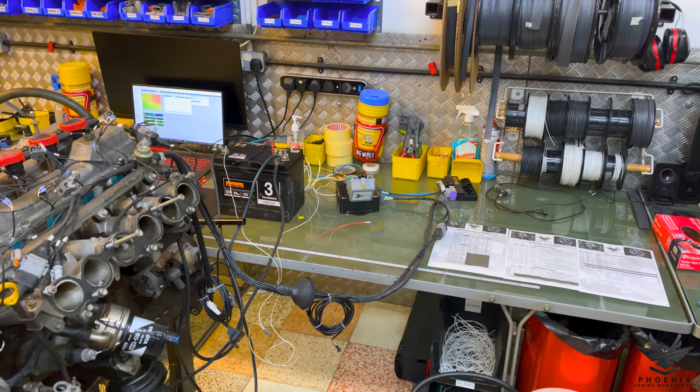Right, as I said, this is a JZ modular harness for an ECUMaster black, but a bit of a weird one, this one. We actually did this harness back in October 2021 for the customer as a JZX100 plug and play. So down in the description below, I'm going to link you to that original video where we went through everything of what the harness used to be like, because I'm not going to go through everything today.

But what we've basically done is the customer now wants to put the engine and harness into another vehicle. So we have actually changed it from being plug and play into a JZX100 to having its own fuse box, so now it can work in any vehicle that he wants to put it into, either now or in the future if he changes his mind again. Obviously, it is running an ECUMaster black ECU. It is completely modular like you see in the original video.

So what have we done? Well, we have done a little bit of it, and I've got some pictures which you'll see at the end of the little changes that we did make, but I'm going to go through them with you now. So as you'll see from the JZX100, there used to be 3 body plugs that would have plugged directly into the JZX100. They've now been removed. We put this plug in the middle because two of the plugs were too short to reach the fuse box. The other wires, as you can see, are just running along that and then into the fuse box over there.

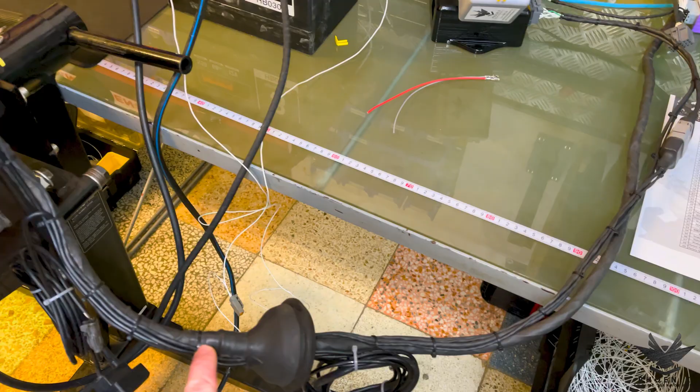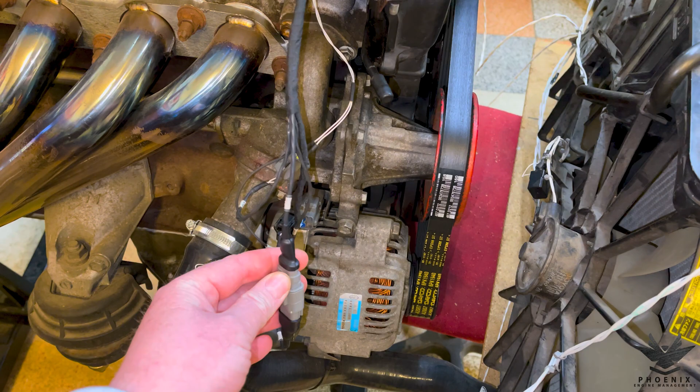Now, what we also had to do is put the alternator wiring in, because on the JZX100, it doesn't come with the alternator wiring included. It's part of the body harness. So it comes out of there, runs all the way along here. So you can see the 2 sort of sections that pop in there. It goes through the grommet over there, pops up, goes all the way along over here, over the top over there. So I'll get my hand out of the way because the camera keeps trying to autofocus, and pops down to over here. And you can see we've got the alternator plug over there. And then that goes into the alternator.

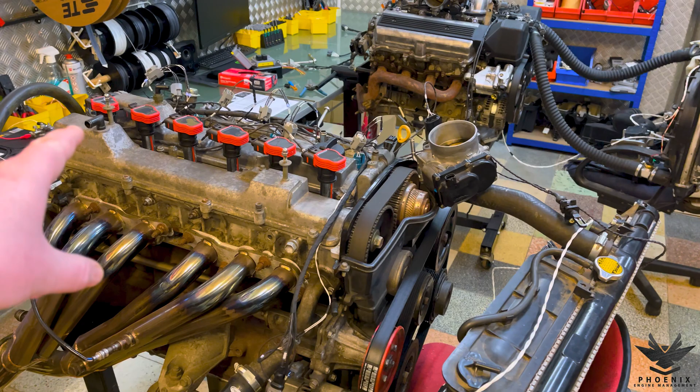So again, because of the vehicle it is going to go into now, we needed to include all of the alternator wiring in there so he can just plug the main power for the alternator in. Everything else in the harness is staying exactly the same. We made some repairs on the harness because I think one of the terminals on the crank sensor plug wasn't working anymore, and I think the cam sensor plug was broken, so we have actually changed that as well.

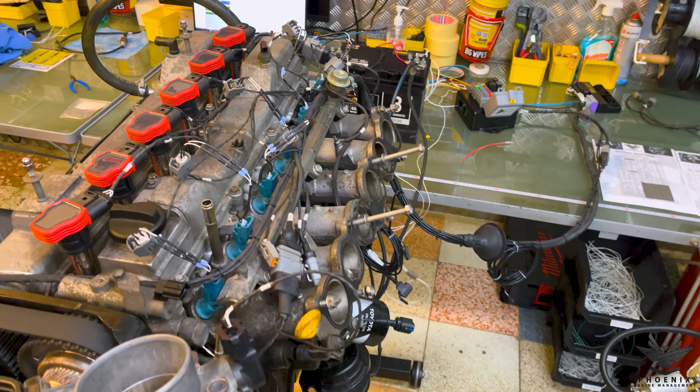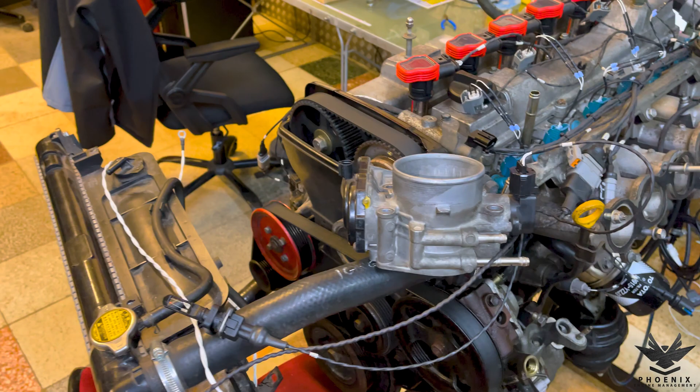All right, so that's pretty much all the changes that we've made. We just obviously neatened it up a little bit. There's been some alterations that have been done elsewhere. Things like he's now using a Nissan idle control valve. So obviously that's all been changed prior to it coming to us. And obviously we've added in the fuse box, which is the major part over there. So that is now the major thing that we have changed.

So what we're going to do now is, instead of going through the whole layout like we normally do, because again, you can watch the original video, it goes through everything here because all of the stuff hasn't changed, like the coils and injectors, etc. So what we're going to go through now is the fuse box, so the customer knows exactly how to wire everything in to the new vehicle that he's going to be putting this into.

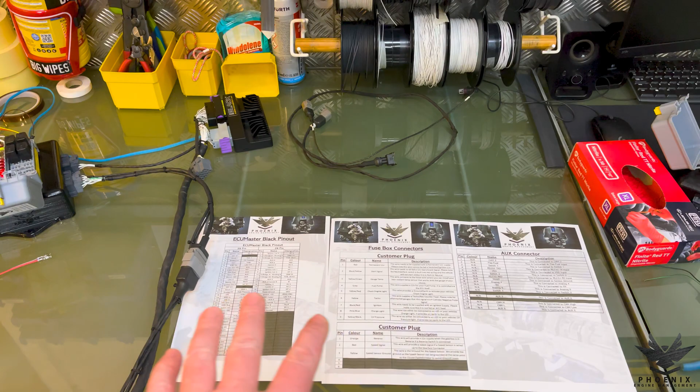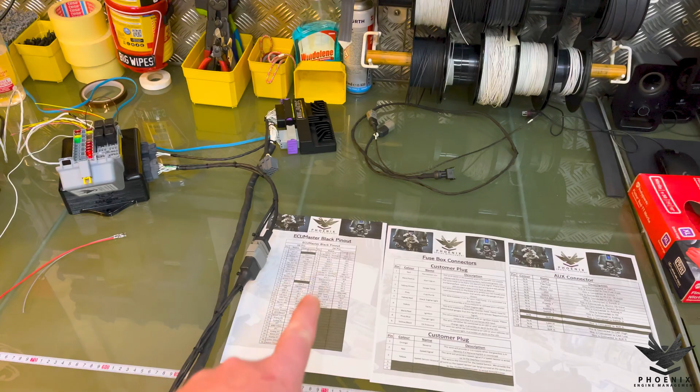So with all the harnesses, we do have the welcome packs. This is just 3 of the 5 pages that you would get via email when you buy the harnesses from us. So first of all, we're going through the entire pinout of the ECU. Now, obviously, not all of the pinouts are applicable to everything. So for instance, he's not running drive-by-wire. So although drive-by-wire wiring is in the plug, he's not actually running that.

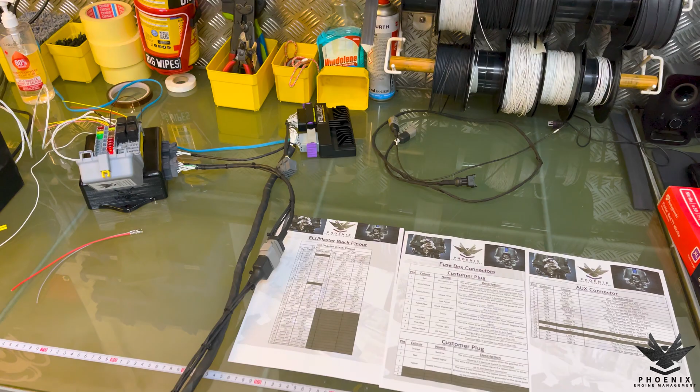He could upgrade to drive-by-wire if he so desired, but in this case it is not actually wired up. So some of the pinouts will tell you exactly where everything goes or what it can be used for, but not everything is actually utilized in these harnesses. Okay, he is using quite a lot of the stuff. So he does have all of the stuff like oil pressure and temperature sensor. He does have a fuel pressure sensor as well. He is also using a gearbox harness.

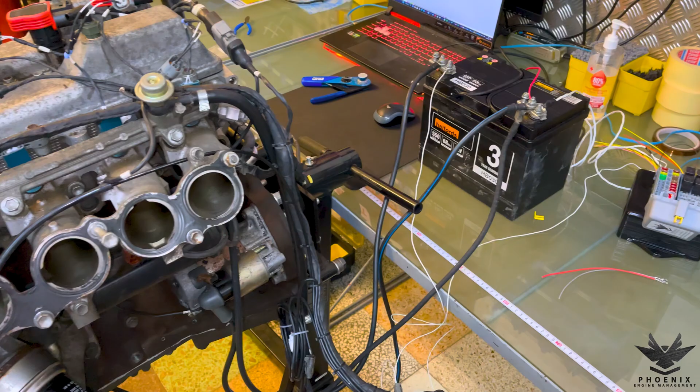He's got a reverse switch. I think he's using a BMW gearbox. So he is using a lot of it, but not all of it.

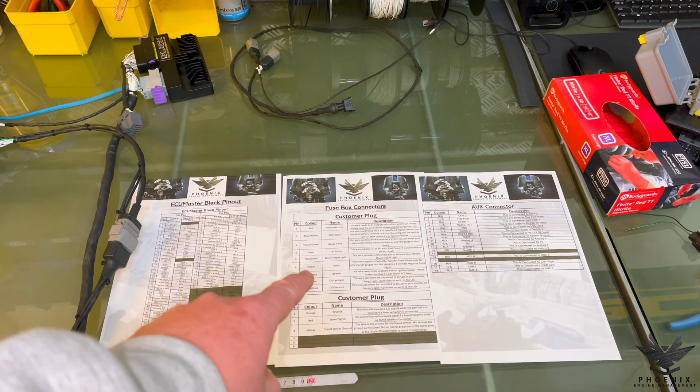So going on to the connectors that he needs to connect into the vehicle now, it is again super straightforward. If you've seen any of our other videos, this 9-pin plug is going to be another repeat for you guys, but for the customer, we're going to go through it step by step. So the 9-pin plug is just over here. So remember, all of these 4 plugs are completely unique. You can't plug them into the wrong place. You don't have to worry about that at all. Okay, so this is the 9-pin plug over here. This is the one I'm going to be talking about now.

So first of all, we've got our red wire, which is a big 14 gauge wire. So that is the main power for the harness. So that's where everything is getting its power from in this particular case. Now, the ECU does have what we call a battery signal or a permanent 12 volt signal. So that can be connected to permanent 12 volts. But as it is an aftermarket ECU, it can also be connected to an ignition 12 volt source.

But usually due to the amps that it's going to pull, most of the time little switches can't handle that, because remember, everything like the starter motor, everything is running through there. Well, at least the solenoid for the starter motor is. So I always advise normally just take it to a battery direct source rather than running through an ignition power there. Okay.

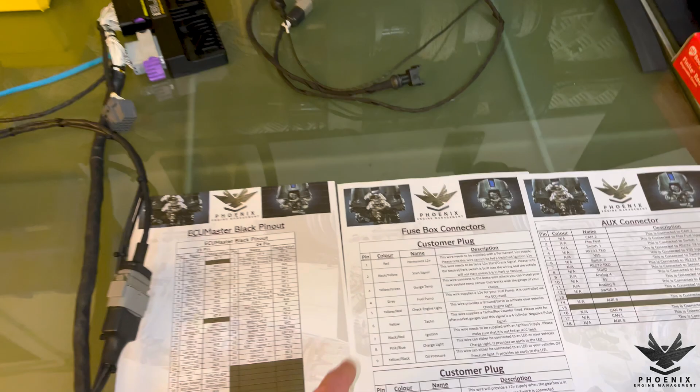Number 2 is going to be black with the yellow, and that's our start signal. So again, that's really nice and straightforward. Now in this case, with ECUMaster Black, we don't control the starter with the ECU. So in this case, it does need a 12-volt signal. So you are going to require a 12-volt signal for the starter to get the engine to crank over exactly like it was in the JZX100.

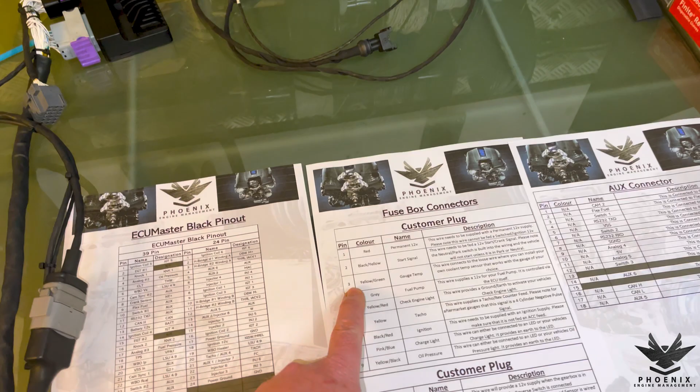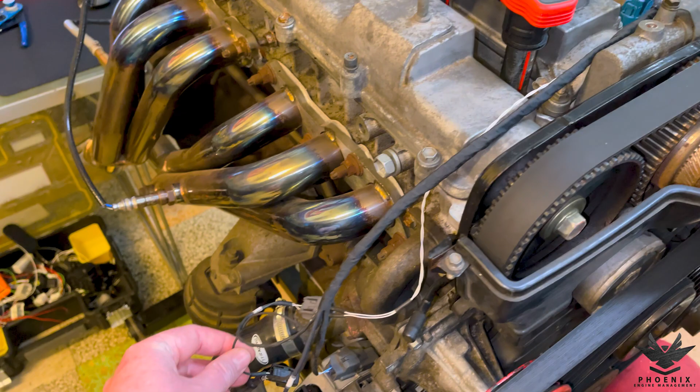Number 3 is going to be yellow with a green, and that is going to be temperature. Now in this case, because it was a JZX100, originally we did actually include a coolant temperature sensor plug, because that's what the JZX100 would have required. So that's what this one is over here, labeled as temp. So this one now comes out of the fuse box at the green with the yellow wire, whereas it normally went into the vehicle, obviously in the JZX100.

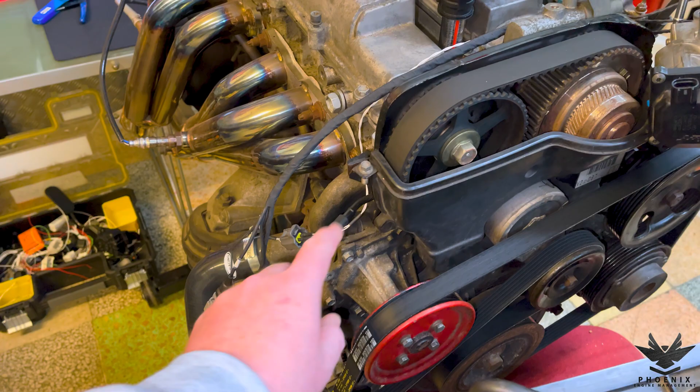Now you can obviously replace that coolant temperature sensor with whichever one you need. So as I've advised to the customer, I think he's putting it to a BMW. The best thing probably to do is try and get a BMW coolant temperature sensor. Fit that in place of where this one went on his original coolant bridge that went over here, and then obviously he can then take that directly to his dash, and because it's the same sensor the dash is looking for, it's really straightforward.

Next up is number 4, and that is gray. So this is a 16 gauge gray wire, and that is going to be for your fuel pump. So that's going to give out 12 volts. You can connect that directly to your fuel pump. If you want to run a relay by the fuel pump, if you've got a pump that draws a lot of current, we fuse this at about 20 amps, which is mostly fine for 90% of fuel pumps. But if you need more current, then by all means, just use that as a trigger for a relay by the fuel pump in the rear of the vehicle. No problem there at all.

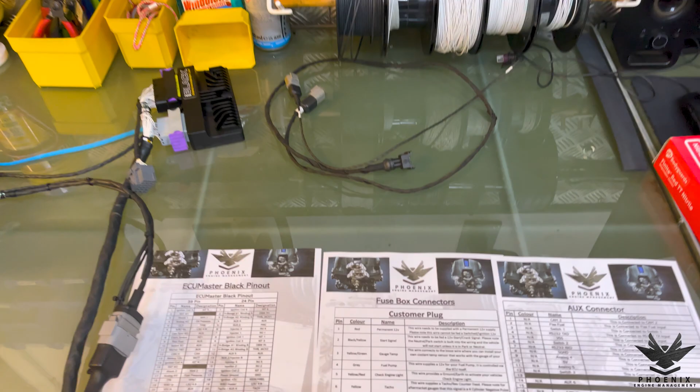Right, next up is going to be 5, which is yellow with a red, and that is your check engine light. Now, as per usual with all of our fuse boxes, we've got an LED in here for the check engine light, so you can see when the system is switched on. And obviously that yellow with the red one can then be wired to your dash, which then will make the check engine light work if your vehicle is equipped with one. Again, that puts out a ground. So if your vehicle doesn't come with a check engine light, but you'd like to fit one in the dash, grab yourself an LED and you can just take that to the ground side and give an ignition 12 volts to the other side, and Bob's your uncle, you're done.

Then number 6 is going to be the yellow. So again, solid yellow color, and that is going to be your tacho signal. So that is programmable from the ECU. So that's very nice as well. And obviously that can then run the tacho, and you can program that to whichever one you want.

So you don't need to make any changes or need any extra devices. It can all be controlled and altered in the ECU. Obviously I've got videos on how to do that if you guys want to know how to change the tacho signal and get that working correctly.

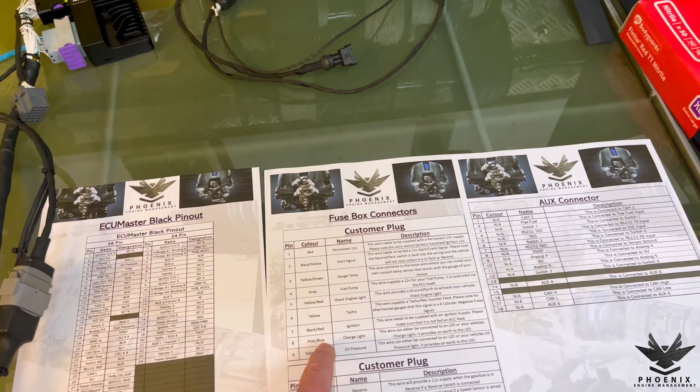All right, and then next up is number 7, and that's going to be black with a red tracer, and that is your ignition 12 volts. So that's what's going to turn the system on, right? So that's the one you're going to take from the back of your key barrel, from your switch that you fit inside your car, whatever you want to use. That does require a 12 volts to activate, okay? So if you're going to run it through a switch, normally you'd have permanent 12 volts to one side of the switch, and then obviously through the switch back into the ignition 12 volts, and that will then turn it on when you flick the switch.

If you're using your key, just make sure that you are aware that keys have two 12-volt positions. One is accessory, one is ignition, okay? And what you want to do, if you are using a multimeter and looking for the ignition switch at the back of your key barrel, is put the key to ignition, find the 12 volts, and then move the key to the start position and make sure that 12 volts doesn't disappear, okay?

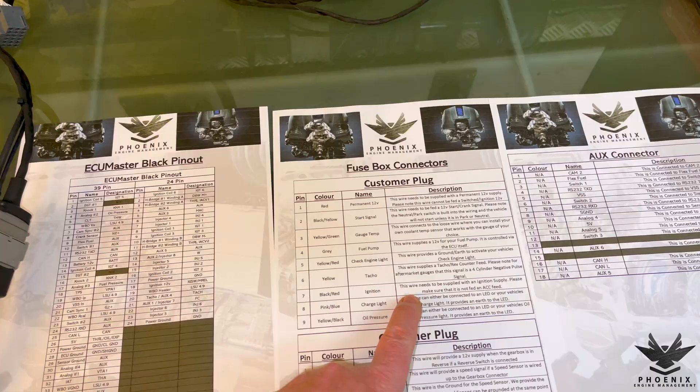Accessory feed, what it does is when you move the key to the start position, it cuts power to the accessory feed. So obviously that is not ideal, because if you do that, you're going to cut the power to the fuse box and to the ECU. You're going to shut everything off, including your injectors and coils, and the engine's not going to fire. And every time you release the key, everything's going to turn back on again, and it is going to drive you nuts trying to figure out what the problem is. So please make sure when you are fitting it that you give it an ignition 12 volts and not an accessory feed, okay? I do normally write all that down, so it is written in the paperwork as well.

Number 8 is pink with the blue, and that is your charge light. So what I mean by that is your alternator light. So that's going to be on your dash, some people call it charge light, some people call it alternator light, etc. It is a ground supply, so it goes to the ground side of an LED or the ground side of your dash, which is usually the case with most dashes and how they work. Obviously, that is coming directly from the alternator down here, from that 3-pin plug over there.

Right, so little things to know about that alternator light. What I've seen in the past on older vehicles, so it might apply in this case as well because it's going into an older BMW: if you have a normal bulb in your dash and your dash doesn't come fitted with some sort of diode to stop backfeeding into the alternator, then we would advise that you fit a diode in place. If you're lucky and your dash has the ability to swap out the bulbs, and people have created LED bulbs for your dash, then that is perfect. You can just replace your bulb with an LED, and that'll do the exact same job because LED is a light emitting diode. So it is a diode and it will stop the backfeed there.

Super important because I have seen cases where vehicles have actually been kept on even when the key is turned off because it's backfeeding through the dash, through the alternator, back into the fuse box again, and causing issues there. So please make sure that if you are turning the key off and the ignition stays on or the ECU stays on, take a look at that first. That's more than likely what your issue is.

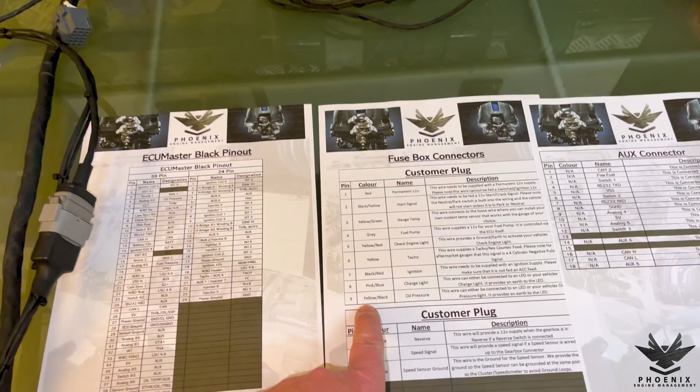And then lastly, number 9 is yellow with a black, and that is your oil pressure. Now, in this particular case, the customer did actually opt to have both the oil pressure switch and a Bosch oil pressure and temp sensor as well. So he does have the ability, if he's kept this one, to put a T-piece in there and fit this one and this one in place. That yellow with the black wire is going to give out a ground, and he can use that as an oil light for his dash. Okay, so that's fine there. The only extra one on here is a plug left over from the JZX100 plug and play section, and that's what we call our auxiliary connector.

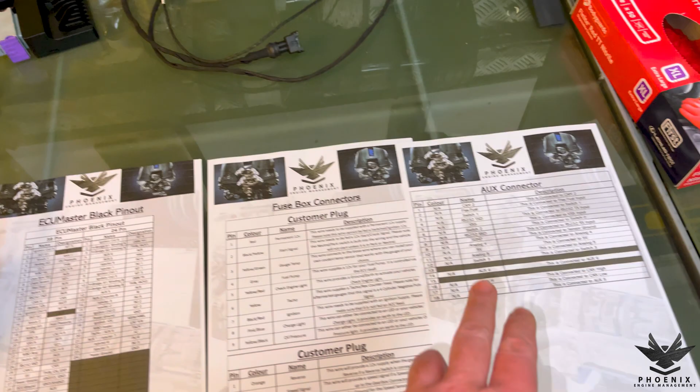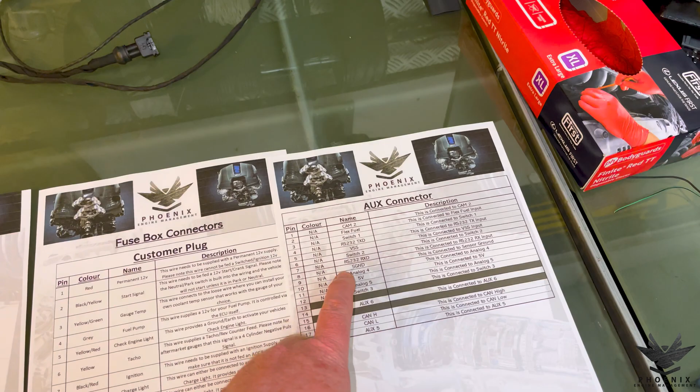So basically this is a whole bunch of stuff that is not used in the main harness itself, and it's left over. And it's mainly things like the RS232 communication, some switches, CAN high, CAN low, some auxiliaries we didn't use. We also give a signal ground and a 5 volt. So I think there's 2 analogs in there that we haven't used in the harness. So again, this is for expansion if you guys want to add some things to the system without having to sort of chop and change all the wiring inside the ECU.

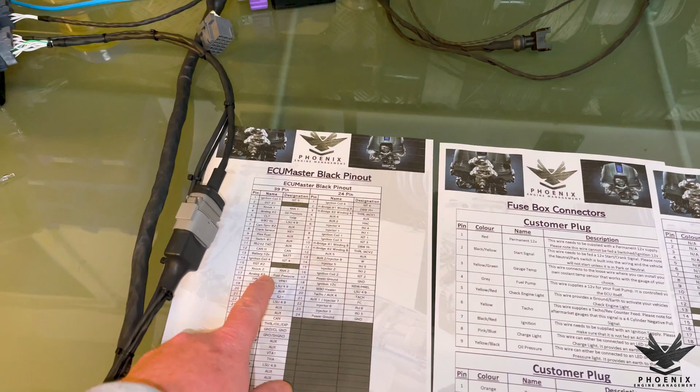So as you can see here, the only ones that are not populated are basically the EGTs over there. But obviously, if you wanted to fit 6 EGTs, I'm presuming you'd use some kind of CAN to EGT device, in which case you could connect the CAN from that up to the EGT device and then run EGTs in your exhaust if you wanted to. Okay. Right, so that's pretty much it in terms of the actual additions that we've done, gone through the fuse box, all the connectors and everything for that.

So what I'm going to do now is pop away. We're going to come back and we're going to do some testing. We're going to test obviously with the plenum off. So we want to make sure all of the coils are firing, the injectors are firing. Then what I'm going to do is pop away. We're going to put all the inlet manifold back on again. We'll use the dumb coils that it originally ran with, because luckily the ECUMaster Black can run the dumb coils without an igniter, which is wonderful. And obviously then we'll actually fire the engine up, and I'll be changing out these throttle harnesses and so on to work with the 2JZ VVTi throttle body, which is drive-by-wire. Okay, so bear with me and I'll be back in a second, guys.

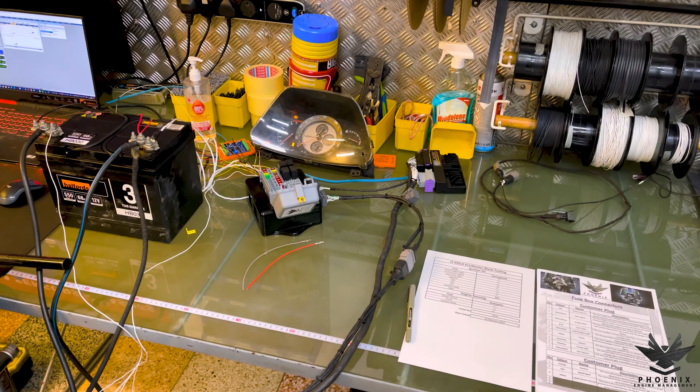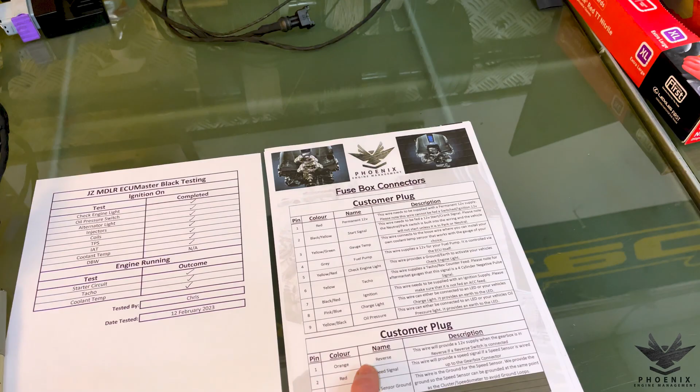Right, guys, sorry, I nearly forgot. I didn't go through the last 3 wires that we have in the fuse box connector, which is the 6-pin plug over there. And that is going to be, in this case, pin 1 is orange. That is reverse. That's going to give 12 volts when the reverse switch is connected. Obviously, that's in the case of this harness, he is using a reverse switch.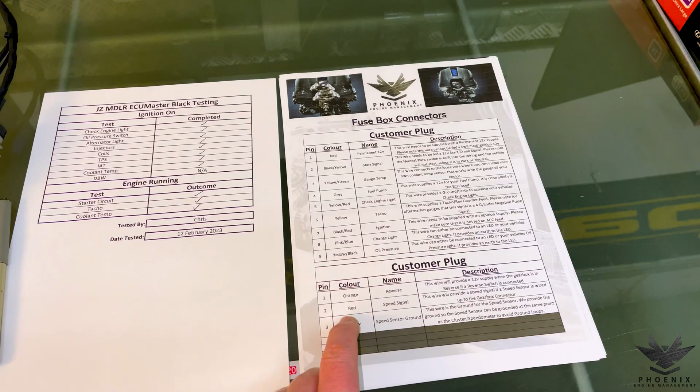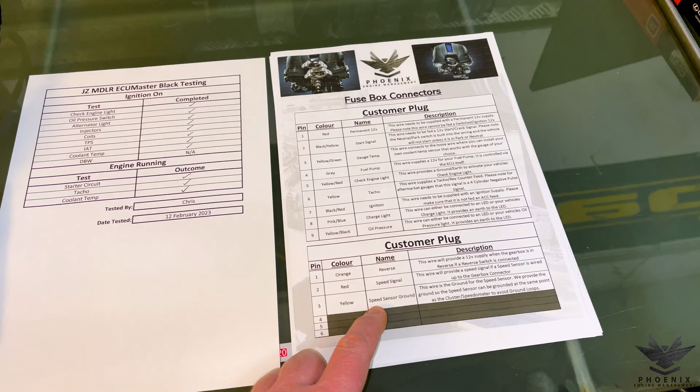Pin number 2 is a solid red. That would be a speed signal. So if you decided to connect a speed sensor to the gearbox sub harness, that is where the signal would come through. And obviously number 3 is the speed sensor ground. Now we do that because normally in Toyotas, they take the ground of the speed sensor to the cluster so that the cluster and the speed sensor are grounded at the same place, therefore avoiding ground loops. All right, so back in a second with the testing for you guys.

Right, guys, so now we're back for the testing, and as per usual, it is going to be made up of 2 parts, one with just the ignition on and one with the engine actually running. Clearly, as you can see now, we're going to be testing with just the ignition on. This engine isn't running in its current configuration. So first thing I'm going to do is go through all the tests that we are going to carry out today so you can see what we're going to come up against. Then we'll jump straight into the testing with the ignition on.

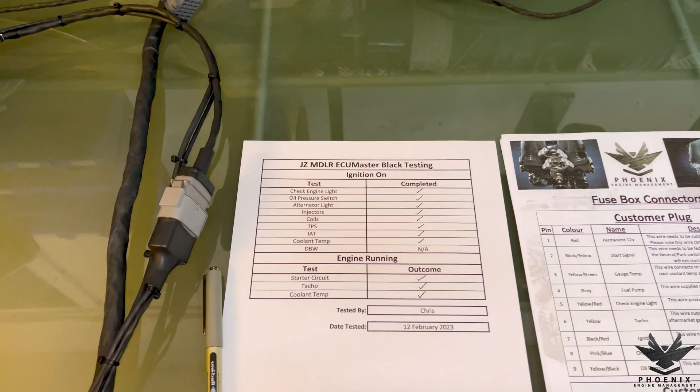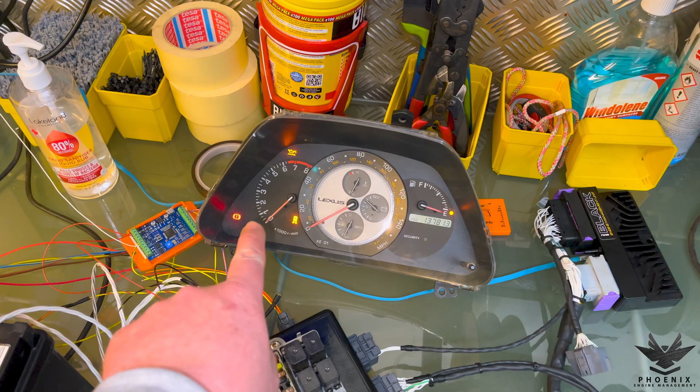So with the ignition on, there's going to be a few tests, not an extensive amount, but yeah, we're going to make sure, first of all, that the check engine light works. We're going to make sure the oil pressure and the alternator light work. So in this case, we're going to have check engine light in the top there. We're going to have battery, and we're going to have oil pressure light coming on there. What I'll then do is unplug the sensors like the oil pressure one at a time, and you'll see the light go off to make sure that that is the correct wire going to there.

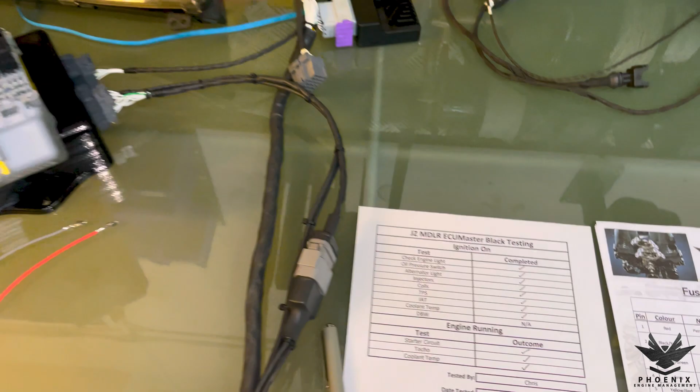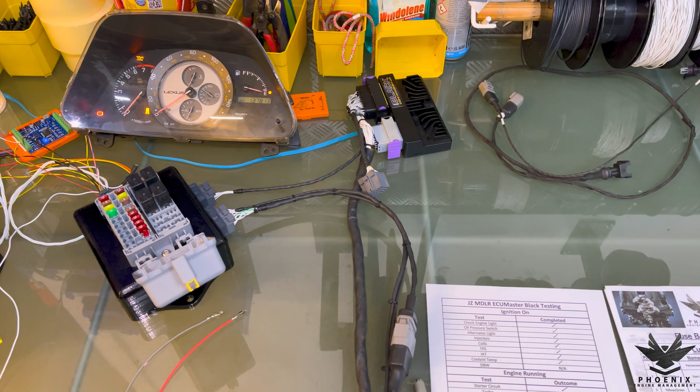Then we're going to jump over to the laptop over there, and we're going to test the injectors and the coils. So I can use the ECU to fire the injectors and the coils, and therefore we'll know exactly if they are working as we expect them to. Next up is going to be the TPS, the IAT, and the coolant temperature. So in this case, because a 3UZ throttle has the same TPS as a JZ, I'm just going to push the throttle blade open, and we'll check the TPS value go from a small voltage to a higher voltage as we do that.

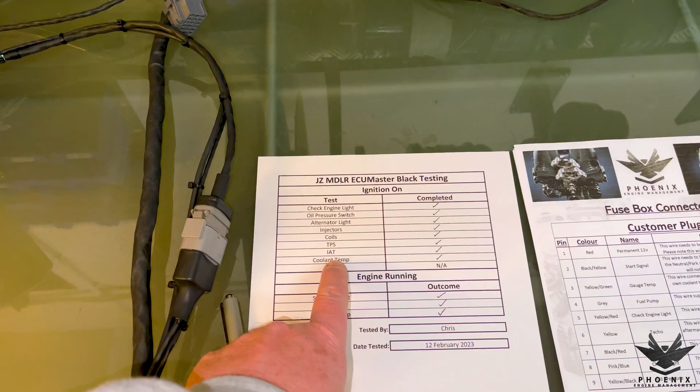We'll also make sure the IAT and the coolant temperature are working. Now that is in relation to the ECU. So again, we can unplug the coolant temperature sensor down here. We can also unplug the IAT sensor, which is just over there, and make sure that the ECU goes to its default values when they disconnect, and goes back to reading an actual value when they are connected again.

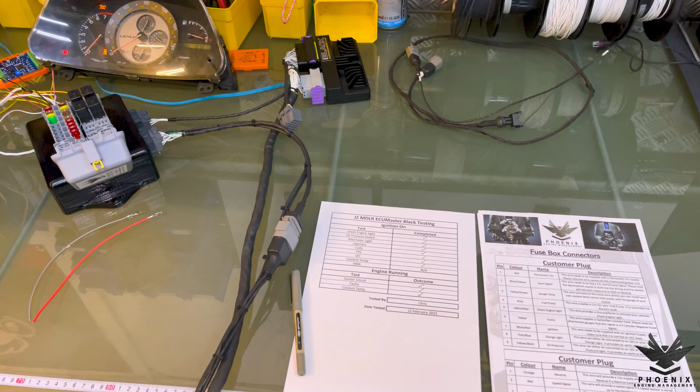Then obviously drive-by-wire I've got not applicable because in this case we don't have drive-by-wire. And that's all the tests with the ignition on, and then we have the engine running, so it's going to be testing the starter circuits. I just want to make sure that when I touch the black with the yellow wire with 12 volts, the starter motor engages. That's what we're looking for there. We're also, once the engine is running, going to make sure the tacho works. So we're making sure we've got a signal coming through there.

And then what I'll do is run the engine for a bit to warm it up. So on our coolant temperature gauge over there, we should see some temperature coming through. That will then tell me that the yellow with the green wire over there is connected correctly. And if you guys have any interest at all, on the 2JZ-GE VVTIs, you'll see there's a brass fitting over there. You can actually take that out and fit a JZX100 sensor in, funnily enough. So there's the one for the temp ECU, and there's the one for that.

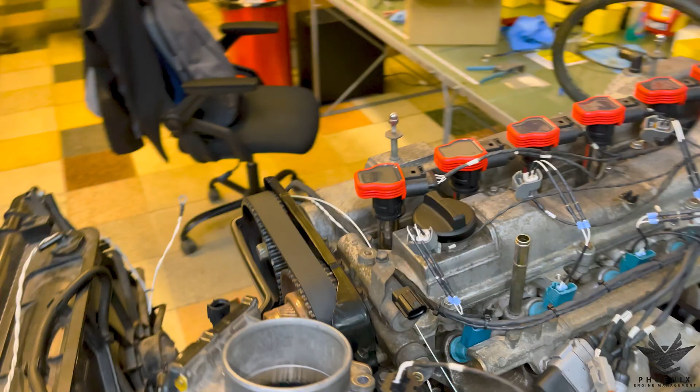Obviously, you guys with your GTEs, all your coolant temperature sensors are in the water bridge coming out over here, so you don't have to worry about that. But if you're 2JZ-GE VVTI guys, you can get a temperature signal from a second bung in the cylinder head there. Okay, right, so let's jump into it. First thing we're going to do is put the ignition on, and that's going to kick off the testing of all the lights. So bear with me a second while I do that. I'm just going to balance the phone over here.

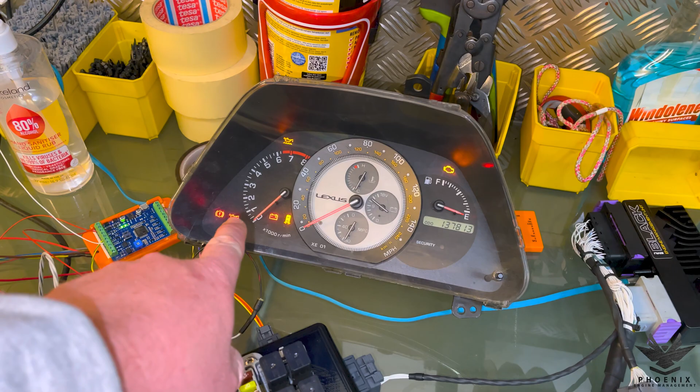Rightio, so now that my hands are free, you can probably hear all the beeping going away there. So I've connected the black with the red to 12 volts. Everything is turned on now. You can see we've got our alternator light, our battery light, and our oil light over there. So that's exactly what we want to see. The check engine light I can't turn off, so to speak, but I'm going to unplug the oil pressure switch over here now. And as soon as I do, you're going to see the oil pressure light turn off. There you go, plug it back in again, and it goes back on again.

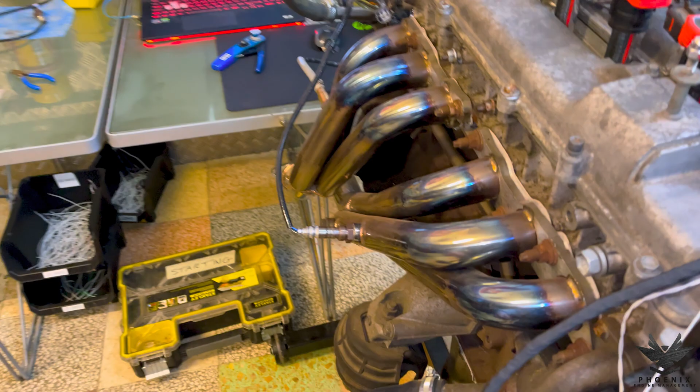Okay, so same thing over here. We're just going to disconnect the alternator. So you can see I'm just disconnecting the alternator over there, and our alternator light has now gone off. So that's perfect, exactly what we want to see. Okay, plug the alternator back in again. And obviously, the alternator light comes straight back on again. So super happy with that. Right, so that's the alternator light.

Next up, let's do the injectors and coils. Now, it's nice and quiet here, it is the evening time, so hopefully we're going to be able to hear all these injectors clicking away as I activate the testing. So again, nice and simple. I've got a video on how to test all your outputs. You just go in the corner there, test outputs, and now I can select each one as I want. So let's go for injector 1. Okay, and there you go. You can hear that injector clicking away.

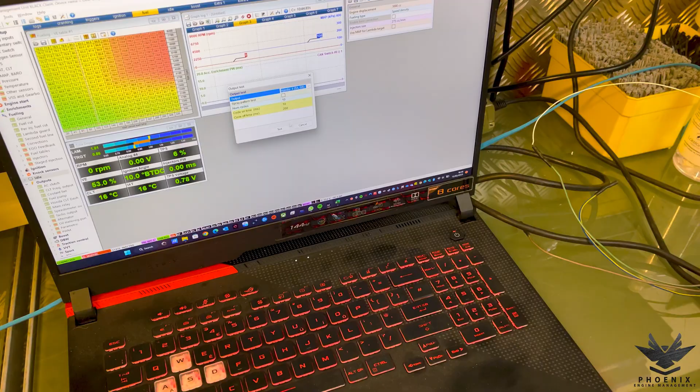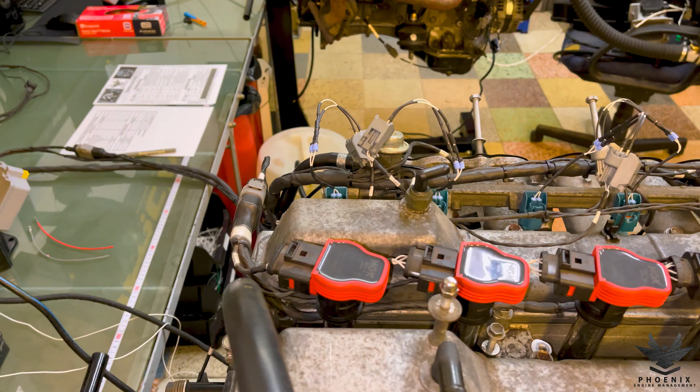Let's go to injector number 2. There you go. Injector number 3. There you go. And injector number 4. There you go. Obviously, I've not put fuel in the rail, guys, so I'm not squirting into the cylinder here. Injector 5, at the back over there. And lastly, injector 6. Right, okay, so that's a very brief test.

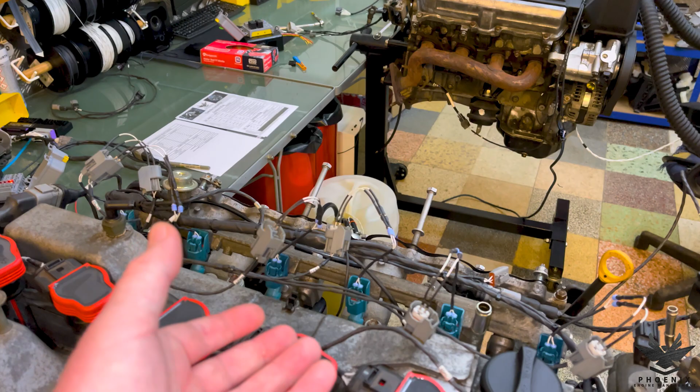What I would normally do is test injector 1, then unplug injector 1, test it again, and make sure injector 1 is injector 1, and not injector 2, etc. Or you can actually feel the injector with your fingers if you have incredibly sensitive feeling. You can feel the injector actually pulsing as you do that. Next up is going to be the coils, and I'm going to do the exact same thing here. You're just going to hopefully hear them click. So let's go for number 1. Again, hopefully you heard that. Let's go to coil number 2.

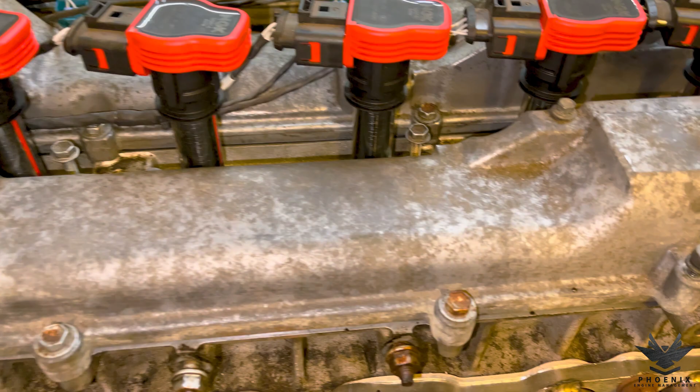There you go. That valve must be open because you can hear it through the exhaust. Let's go to number 3. I think that's the inlet valve open because I can hear it out the other side over there. Coil number 4. And that one's slightly open valve because you can hear it better than number 1.

Number 5. And that's fully closed. That's very, very quiet, that one. And number 6. Again, sounds like they're coming out the exhaust hole there, so that must have an exhaust valve open.

Right, okay, so again, same with the other one, what I would normally do is obviously I would test coil 1, make sure it fired, lift out coil 1 or unplug it, test coil 1 again and make sure that it wasn't firing to make sure that coil 1 was coil 1. Obviously, I've done that off camera, guys. But again, I don't want to make a 45-minute long video of going through every single thing. So those are the injectors and coils done.

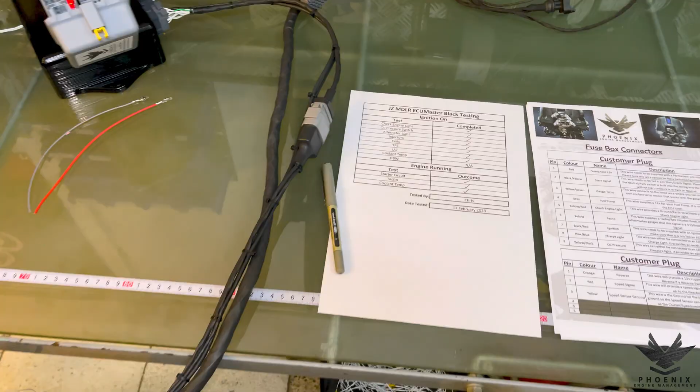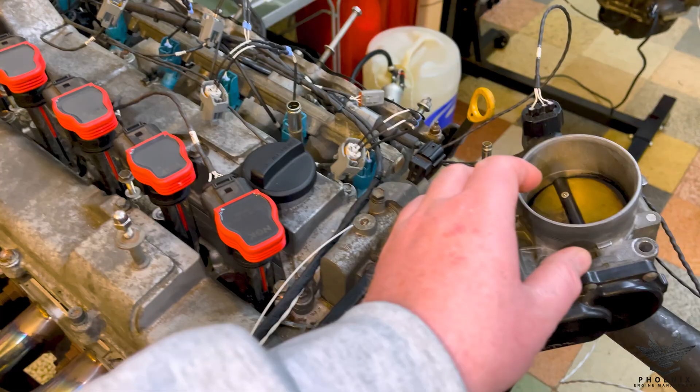Right, so what are we going to be testing next? It's going to be TPS, IAT, and coolant temp. Right, so what I'm going to do is have a look down here, and you can see that we've got our TPS value over there. And basically all I'm going to do now is just use this throttle. And I'm going to push it open, and as you can hopefully see down there, we're on 43. 70, and then I let go again, back to 6%. So hopefully you can see that. It's a little bit small, but yeah, so that's fine.

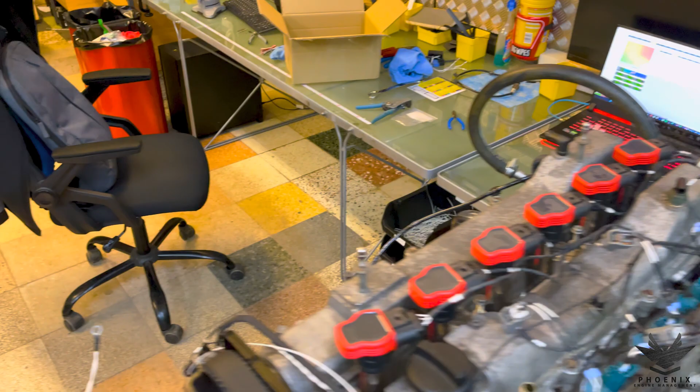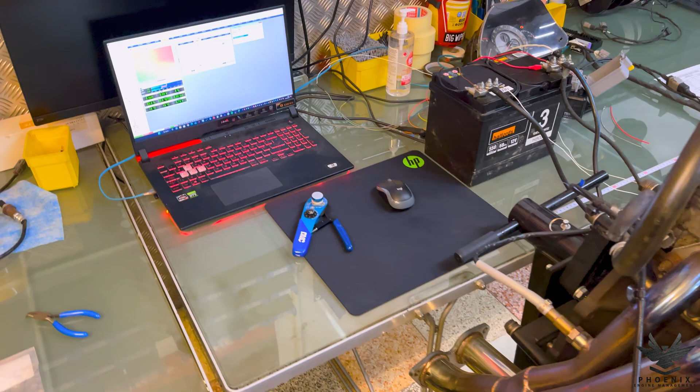So then we're going to go over to the coolant temperature. So right now we can see our coolant temp is 16 degrees. That's quite good, because if the coolant temp and the IAT are pretty much the same on a bone cold engine, that's actually a good sign that your calibrations are correct.

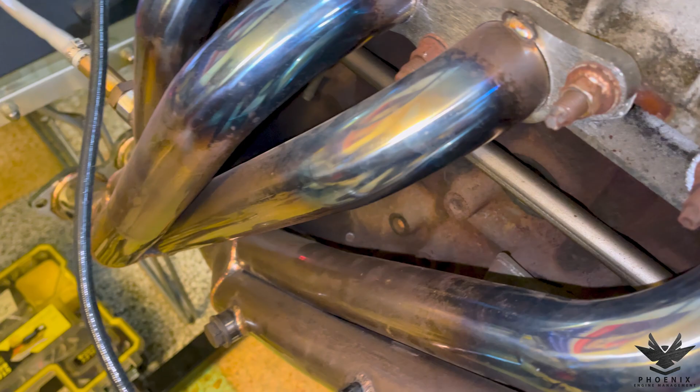So all I'm going to do now is I'm just going to unplug one of these wires on the coolant temperature sensor plug over here. And as soon as I do that, it defaults to its default value or failure value, which is 80 degrees. So give me a second. Okay, plug it back in again. In the right place. And it pops back to 16 degrees, so that's perfect.

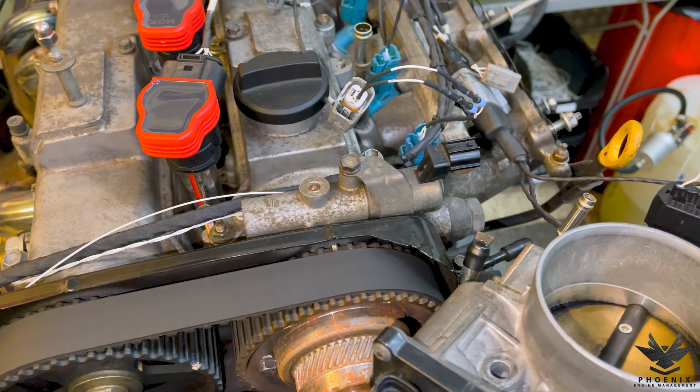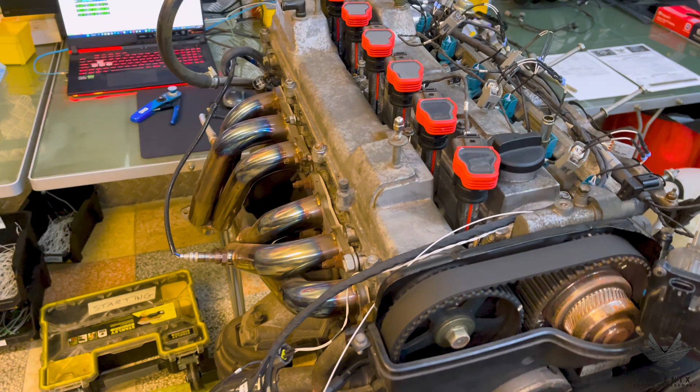Right, so we're going to do exactly the same thing on the IAT temperature sensor over here. I'm just going to unplug that. Pop over to here, and you see that has defaulted to 25 degrees. So if you watch my other videos, you can actually set what I call the default value. It's actually what we call the failure value. So if the sensor was to fail, it's what it defaults to.

Now this can be useful because sometimes guys like Toyota originally actually set it to about minus 40 degrees. Obviously that would then cause your ECU to overfuel, and rich is better than lean if something does happen to go wrong. So again, it's completely up to you guys. The defaults on ECUmaster are 80 degrees for coolant, 25 for air temp. The defaults of the Toyota are minus 40. I think the lowest you can go on the ECUmaster is minus 30. So I normally set it to about minus 30, which would then cause the engine to run rich if there was a failure. And obviously rich is better than lean if something was to go wrong. So there's the mindset over there.

Right, so again, we've done coolant temp, we've done TPS, and we've done IAT. So that's all the ignition on testing that we are going to do now. So I'm going to get this engine back together again. We're going to put the dumb coils in, get my sub harness so I can plug in all the coils. All the injectors and everything are going to stay the same. We'll put the throttle on. I'm actually going to attach the drive-by-wire throttle for the 2JZ because that's what we're going to be using the ECU to run. In this particular case, I can get it to idle nicely. And I'll get it warmed up a little bit so that we can see some coolant temperature coming through on the dash there. So, be a long time for me, but I'll see you guys in a second.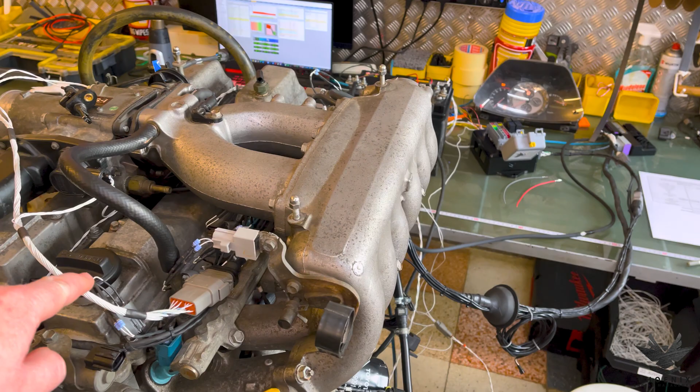Right, guys, now back for the testing with the engine actually running. So we've got everything back on now. Our intake is on. We have our drive-by-wire and everything hooked up with our own sub-harness that we have there. We've got all the dumb coils hooked up with our own harness over there as well. Remember, the ECUmaster Black can fire these JZ dumb coils directly from the ECU. It does not actually require an igniter to do so, but you are able to use the igniter if you want as well.

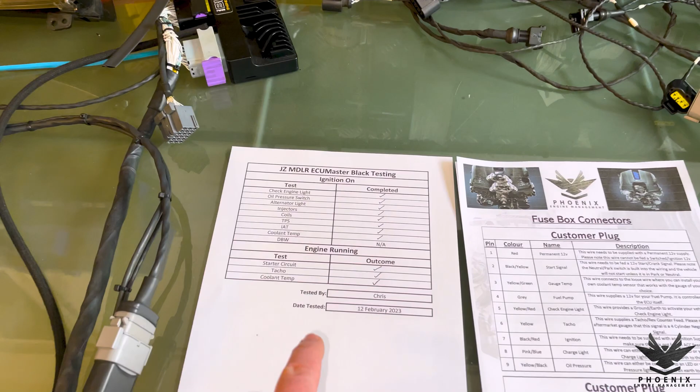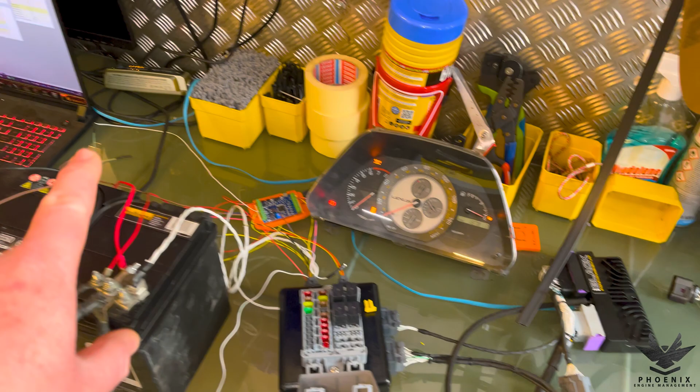Okay. Right, so as I said, it's going to be a really nice simple test, to be honest with you. We're going to be testing the starter circuit, so just going to touch the black with the yellow wire to 12 volts. That's going to then start the engine. We're then going to look and make sure that we're getting a tacho signal through over there, and then I'll reference it against the PC, so we'll see the figure over there as well.

Okay, right, so what I'm going to do now is basically I'm going to put the ignition on. So if you bear with me a second, I'm just going to put the camera down over there. Okay, so we're just going to literally turn the ignition on. Right, so you can see we've got all the lights on there, the battery light, the oil light over there. We've got the check engine light over there. And all I'm going to do now is start her up. So 1, 2, 3. Okie dokie.

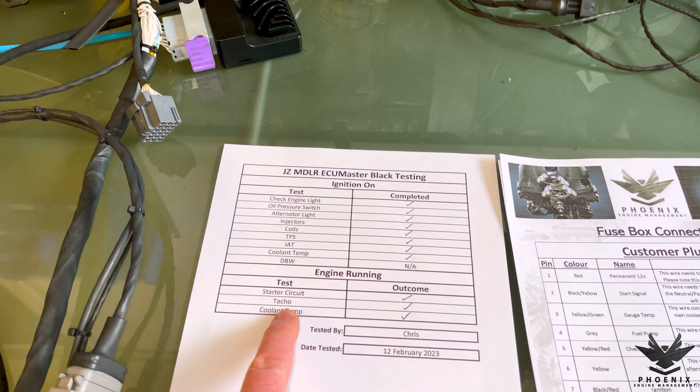So exactly what I wanted to happen, we touched the black with the yellow wire to 12 volts, and then the engine has fired up. And as you can see, she's running nice and smooth there, so no dramas there at all. And obviously, let's go ahead and look at our tacho. So you can see there we're on just about 1,000 RPM. And if I move over, you can see there we're at about 1,000 RPM. So that is absolutely perfect.

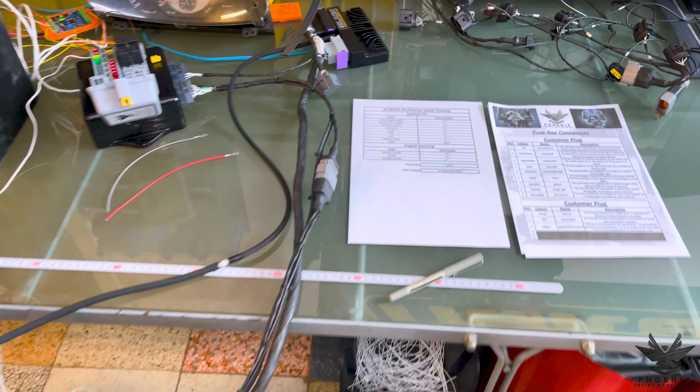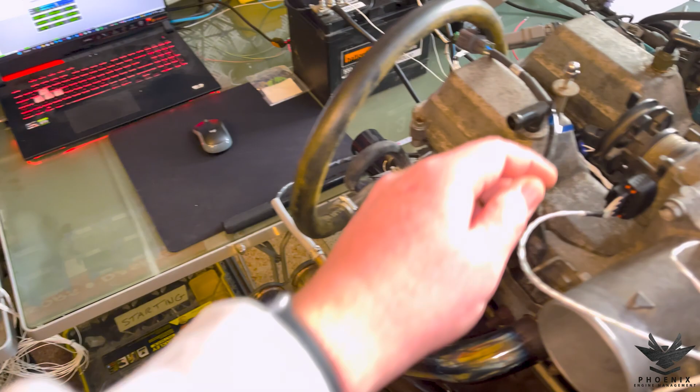And looking at coolant temperature over there, you can see we've got coolant temperature showing up on the dash over there with our yellow and green wire. And obviously you can see the coolant temperature over there is showing in the corner just over there. Okay. We'll give her a little bit of a rev to make sure she is working exactly as we expected. Okay. Alright, so let me kill that down.

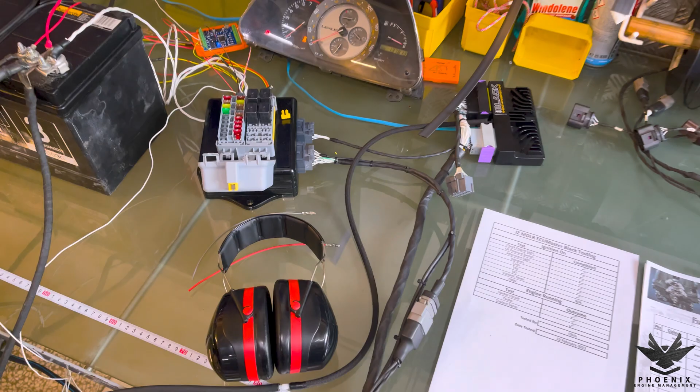Right, fantastic. Okay, so everything is exactly as we expected. She runs, she drives, she idles really nicely. Obviously, I'm using the drive-by-wire, just bearing in mind the original customer has the non-VVTi version. He's obviously using a Nissan idle control valve to take care of the idle, but that's already been mapped on his original map, so that's no problem there at all.

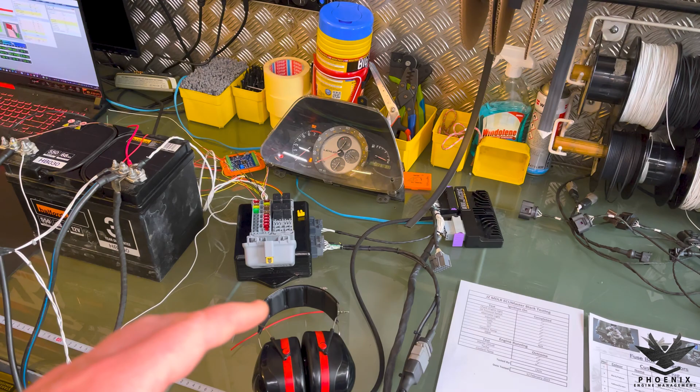Okay, so again, with these ones, diagnostics obviously is in the software of the ECU. You want to be using that to do any sort of diagnostics you want to carry out there. You can see in this case, obviously the oil light and the battery light and the check engine light do go off when the engine is running. Again, you can actually set the parameters for the check engine light in the ECU itself. So again, you can know exactly what's going to cause a check engine light to come on.

But yeah, from this side, we're super happy that everything is there. Obviously, we wanted to test it all nicely because we've changed the whole entire power supply of the harness to make sure that everything is working as expected.

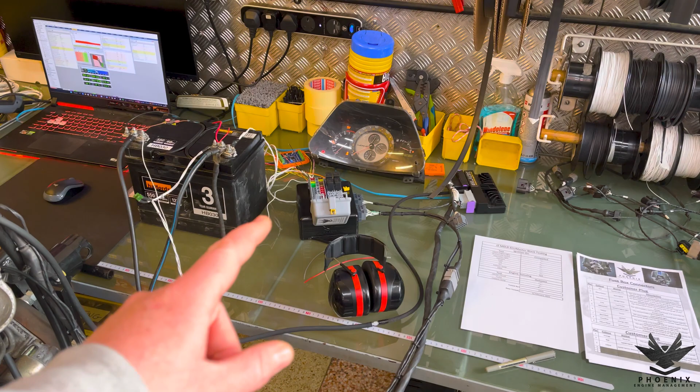If there's anything you'd like to know, obviously this is a very unique harness. It's not something we would generally offer. Obviously we did the JZX100 plug and play originally, and now we've adapted this to fit into another vehicle. So it's not an off-the-shelf version.